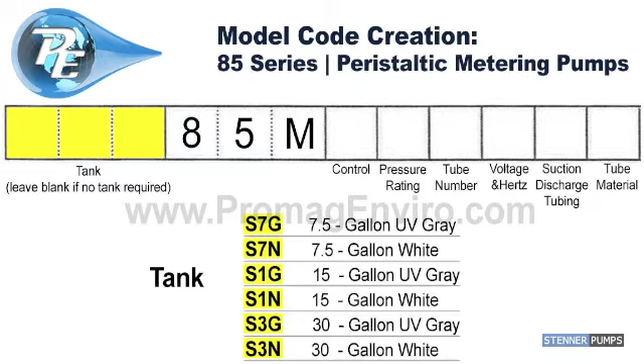The next 3 digits of the model code are 85M. The next selection is control. The letter F represents fixed, and the letter J represents adjustable.

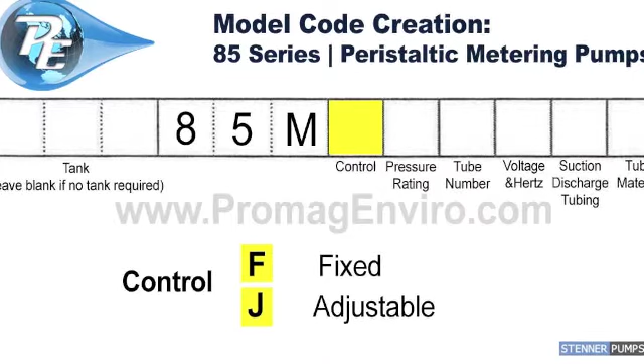The next selection is pressure rating. The letter L represents low pressure, 0 to 25 psi. And the letter H represents high pressure, 26 to 100 psi.

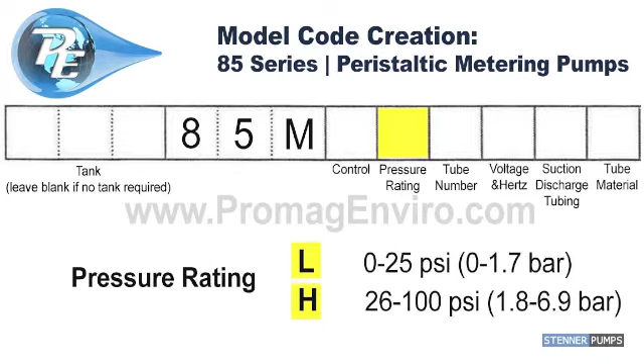The next selection is tube number. The number 1 represents 5 gallons per day, or 19 liters per day. The number 2 represents 17 gallons per day, or 64 liters per day. The number 3 represents 40 gallons per day, or 151 liters per day.

The number 4 represents 60 gallons per day, or 227 liters per day. The number 5 represents 85 gallons per day, or 321 liters per day. The number 7 represents 40 gallons per day, or 151 liters per day.

Take note that tube number 7 is not available for low pressure pumps. And tube numbers 3, 4, and 5 are not available for high pressure pumps. All outputs listed here are at 60 Hz.

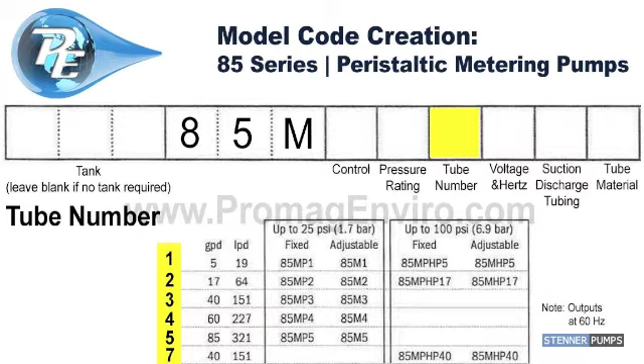The next selection is voltage and hertz. The letter A represents 120 volts, 60 Hz. The letter B represents 220 volts, 60 Hz. The letters C and D represent European voltage codes that are not currently available through PromagEnviro.

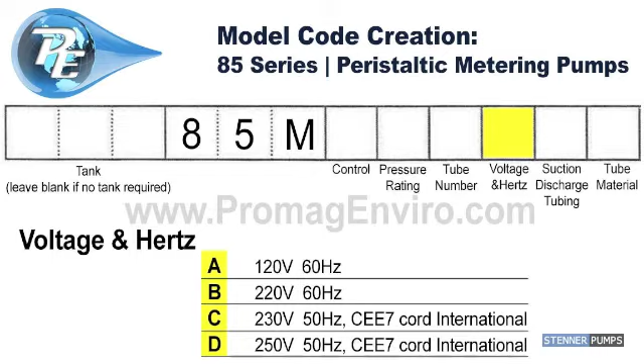The next selection is suction and discharge tubing. This is not to be confused with the tubing number and represents the input and output sizes. The number 1 represents 1/4 inch white. The number 2 represents 1/4 inch UV black.

The number 3 represents 3/8 inch white. And the number 4 represents 3/8 inch UV black. The number 5 represents European sizing and is not available through PromagEnviro.

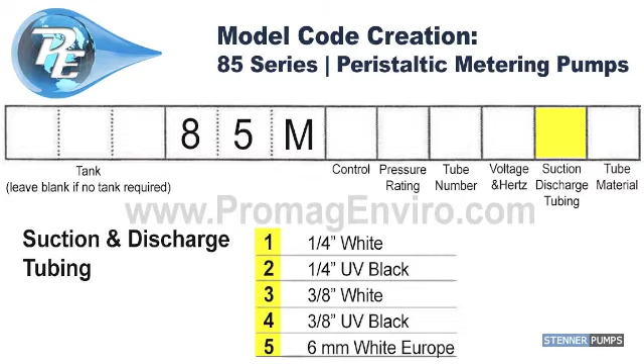The last selection is tube material. Note that this is application specific. Please refer to the chemical resistance chart for chemical compatibility. The letter S represents santoprene. The letter T represents Tygothane. Tygothane is available for tube numbers 2 and 5 only.